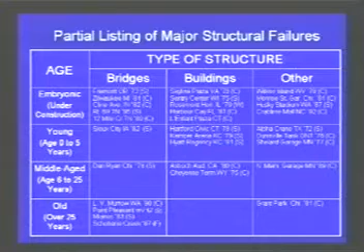The failure of the jump lift forming system of the Willow Island cooling tower in 1978 was the worst construction accident in the history of the United States, and it killed 51 people.

Failures have occurred in concrete parking garages as well in the embryonic category, including the collapse of a bay of the Crabtree Valley Mall parking garage in Raleigh in 1993, and the collapse of the Monroe Street parking garage in Chicago in 1981. Further, we've had many failures of concrete bridges during construction.

Including the collapse of the 3 spans of the post-tension Cline Avenue Bridge in Indiana in 1982, the collapse of a long span I-girder of the 12-Mile Creek Bridge in Kentucky in 1989, and the joint failure of the post-tension segmental Zilwaukee Bridge in Michigan.

Even though they all have a distinct cause, the failures were influenced by the heavy weight of fresh concrete or low early age strength, which often requires as much engineering attention during construction as is given to the final design of the structure. Simply being overly conservative in providing shoring or other support during construction does not offset the lack of critical requirements.

There have also been numerous failures during construction of steel structures, which most commonly are due to instability or insufficient bracing during erection, and we've also had brittle fractures of steel structures, but I'm not going to go into these.

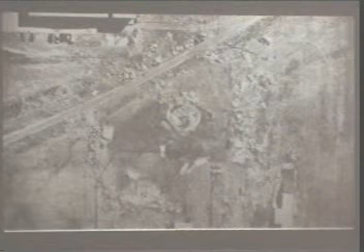This is a view of the site after the collapse of a post-tension concrete standpipe. An aerial view shows the concrete standpipe as the small circle in the center of the picture.

That was a 50-foot diameter pipe. I should note Carl Peterson is here - Carl and I were the ones out on the site very shortly after the collapse. This occurred in February 1976, and the weather was very cold. The collapse was sudden and violent, sending debris throughout a 500-foot radius from the standpipe.

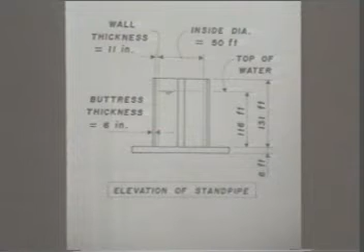Here's an elevation of that standpipe. It was constructed in 1974, so it was 2 years old at the time of the collapse, and the water depth was 116 feet.

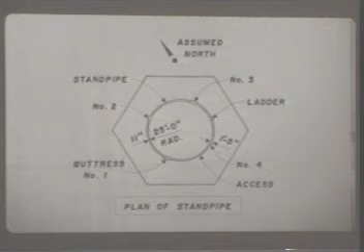Here's a plan showing the standpipe. The buttresses for the post-tensioning tendons were located at the quarter points of the standpipe, and the tendons extended 3/4 of the way around the tank so they could be overlapped 1/4 of the tank for each successive tendon as you go up the structure.

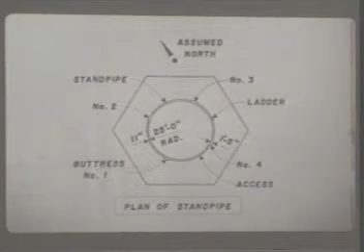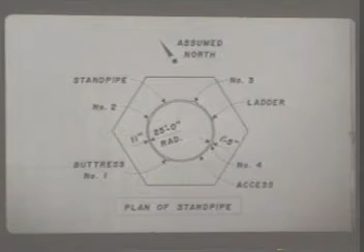The tank was slip-formed, but unfortunately the workmen walked off the job shortly after beginning the slip forming operation. To keep the job going, the contractor went into town and recruited a number of entirely inexperienced people to continue the slip forming operation.

Here's another aerial view. The closest person to this standpipe was on top of a fuel truck unloading fuel, down in front of the standpipe about 100 feet away from it. This person was standing on top of his fuel truck.

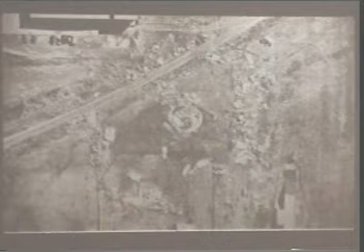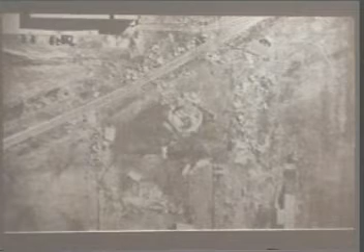This person said he heard a loud noise. He looked up and saw the tank coming apart, and as he stood on top of his truck he was dodging the post-tensioning cables as they flew out away from the tank. Then he held onto the truck as a wall of water hit it, but he walked away entirely unscathed. I suspect he probably had to go home and change clothes, but at least he wasn't hurt.

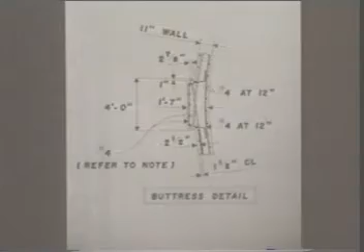Oops, did I go too far? Yep. No.

This is a detail of the buttress, and you can note the number 4 U-shaped bars intended to prevent the buttress from separating from the tank. One bar was required by each tendon anchorage near the bottom, where the tendons were closely spaced.

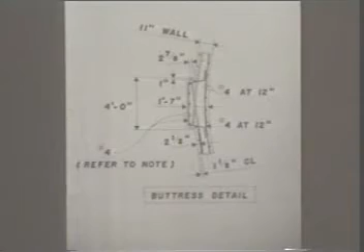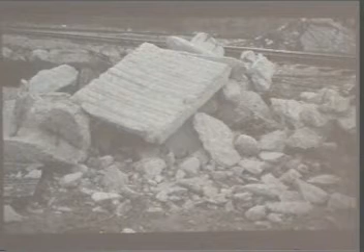This is the anchor detail, and you see there were 2 number 4 bars to be placed just ahead of the anchor. But here you see a piece of the buttress out in the field of debris. The separation occurred in the plane of the post-tensioning cables, and you can see only 1 small piece of reinforcement going through there - maybe a couple on the other side, I don't remember - but very obviously the hairpin reinforcement bars did not get put into the buttress the way they were supposed to have been done.

And as a result, there was this separation of the buttress in certain areas, at least, from the wall of the tank.

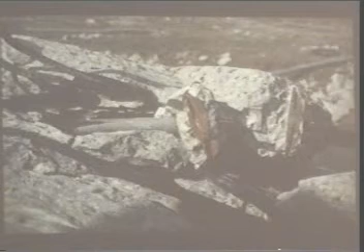Here's another view showing the anchorages and how, because of the lack of the hairpin reinforcement, they were able to simply pull in and force the separation there, at least in certain places.

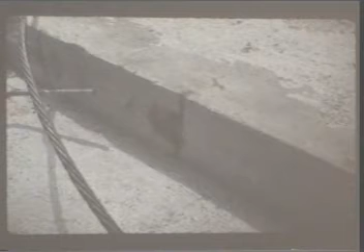Well, here's a piece of the buttress and the wall of the tank which did not separate, and it's a quite large piece. But we know that the failure occurred as a result of the lack of the hairpin reinforcement.

But I guess the question is, why did this grossly deficient construction survive for 2 years before the failure? I think that was due to the ability of tension in the concrete to sustain the stresses of the buttress. But then what was the likely trigger of the collapse?

But this is what you would have seen had you been looking at that tank just a short time before the collapse occurred.

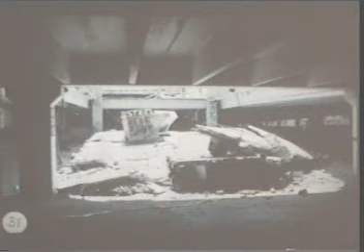In July of 1989, one section of this ramp immediately below the top level collapsed, as you see in this slide.

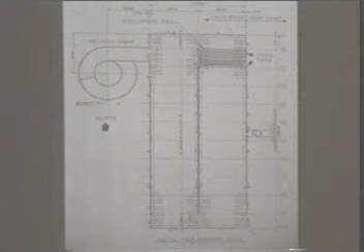Here's a plan view of the area where the collapse occurred. The collapsed bay was at a location where there was a drive-through between the old construction and the new construction. The double T beams in this area had a length of 57 feet.

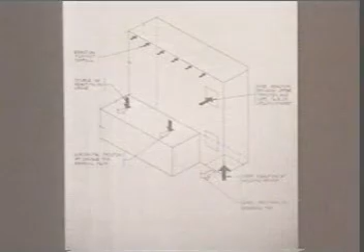Here's a drawing of the spandrel. It was supported by a bearing pad at the reaction and also 2 pads against the column. Here's another view indicating where those reaction points were located. The pads taking the primary loads were shown in the preceding slide, but we should be well aware that volume changes may impose additional forces at these reaction points, which can be quite large.

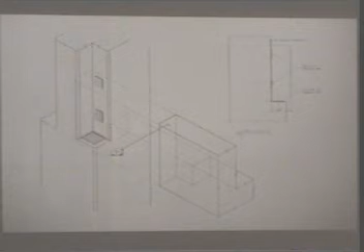Here's a view of the end of the spandrel, where it fell on the lower deck. Here's the end of the spandrel right here. This is concrete that was the curb on top of the double T beams. This is the end of the double T beams at this location.

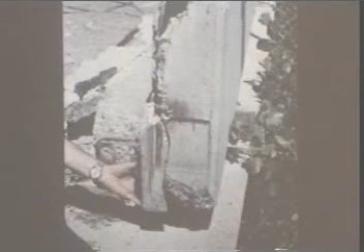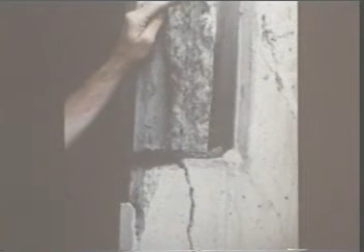The spandrel beam was taken to a storage yard where it could be examined much more closely. A piece of concrete was found at the site, which perfectly fit into the end region of that spandrel beam. This is that same piece of fractured concrete taken back to the structure and set in place on top of the column.

It is very evident here that there has been both rotation and movement of the spandrel away from the column, and also that the bearing pad was badly disintegrated due to volume change forces and to repeated loading from the crossover traffic. Many early precast decks were built which relied on shear transfer through pads for stability and to accommodate volume change movements.

And it is now recognized this was not good practice. While many of these decks have been retrofitted or repaired, there are many others where I think this condition is still of concern. In guarding against failures, I think engineers need to be aware of this condition.

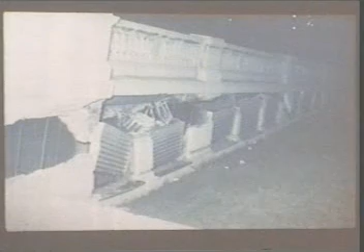I see I'm kind of in an in-between place here, so I think I'll try to quickly show this case history in abbreviated form. This is a parking garage in Chicago, Grant Park Garage, and the failure began along this ventilation opening on a Saturday evening when part of the top of this underground garage dropped down, as you see here.

A few hours later, it fell to the ground, as you see here. Here's a view of the debris on the lower floor, and another view. Here's a plan of the area that collapsed, the area in yellow.

You can see that in that region, the framing is different than in the other regions of the parking garage, where it was either beam and slab construction or flat plate, flat slab construction. This is a section through the area where the collapse occurred.

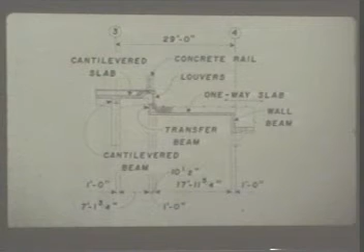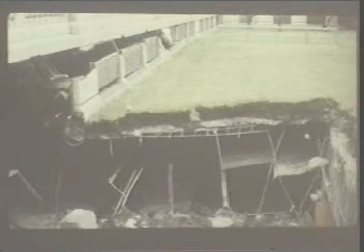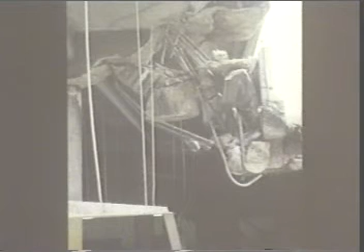Here's the section through the area that collapsed, and you can see the picture. The failure is believed to have initiated in the cantilever beam on the left-hand side here. Here's a close-up view of that cantilevered beam. It shows why it partially collapsed.

You can see the negative moment reinforcement in the beam that extended out to the end of the beam and then down to pick up the end of the one-way slab. When the failure suddenly occurred, that reinforcement served as a tension tie and held the end of that one-way slab for several hours before the steel pulled out and allowed the entire bay to collapse.

Here's a view of the drawings that were available on that structure, hard to see, but this is the cantilever beam, and this is the beam behind it, the anchor main span, labeled B256. You can see that the designer or whoever was doing the detailing didn't quite know what to do in this region, so he put B256, but he put it in parentheses.

Then when it came to the table - is that B256? Yes. You can see that they called out the reinforcement in the manner that you would expect and typical for that time, where they detailed the location of every single stirrup reinforcement in number of inches from the center line of the column.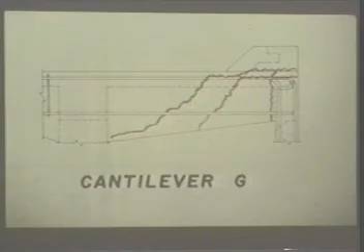You see the absence of the shear reinforcement here. Now, if that cantilever, after the debris is cleared away, you can look at that picture and decide this is probably what the crack pattern was that precipitated or caused the failure.

And when that debris is stripped away, you see the dark colors there, which is seepage of concrete, water and debris down below. But then you can also see how over time corrosion of this main reinforcement occurred in this region here. These bars now were very closely spaced - they're number 11 bars. They did not have any confining reinforcement, so I think that once corrosion started in that region and you started to drive a splitting crack, it was just a question of time until failure. In fact, it took 30 years for the failure to occur.

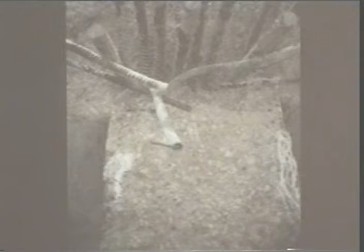A closer view of that, you can see the rust and the imprints of the bars. And the collapse did not extend further because of the stairwell to the right, which served as a supplemental support and kept it confined.

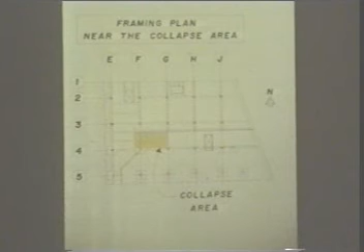Now let's go back to this one. The next cantilever over from G is H - I'll show that in the next slide. And the next cantilever over from that is the one at J. So here's the one at H. It partially failed, but did not totally collapse because of the stairwell.

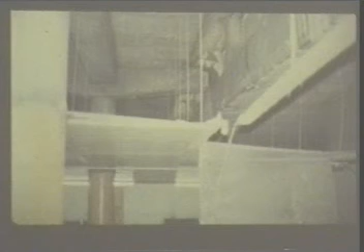And the next one over, you see in the background there, has a little bit of damage to it. The white region there - I'm having trouble getting the picture from this angle - the white region on the bottom there was where some concrete flaked off, but you can see that the main crack is there but did not even open in the cantilever beam.

And imagine this picture without that white region there, and probably without some of that other incline cracking. That is all that you would have seen had you made an inspection of this structure in advance of this collapse.

Well, why did that last for 30-some years? It was because the concrete strength was about 6,000 or 7,000 psi, and consequently the concrete contribution to the shear itself was sufficient to hold or provide for the strength of the beam.

Okay, next go back to the view for my concluding remarks. Let's then now try to draw some observations from these failures and also from the table. Failures and collapses of middle-aged structures have occurred due to volume changes, shrinkage, creep, and temperature, and this phenomena did not receive sufficient attention in design for a long period of time.

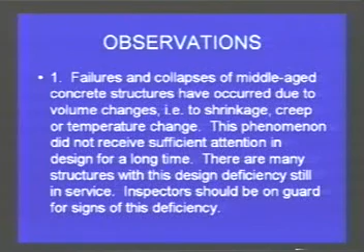All failures in the old category were in structures exposed to the environment and were due entirely or in part to the effects of corrosion. Corrosion of embedded steel has been the trigger for collapses also in young and middle-aged structures. The corollary, I believe, to this is that if a structure survives to an old age and is not exposed to the environment, it is going to have a very, very long life.

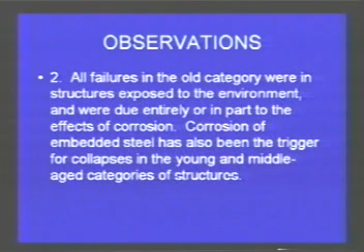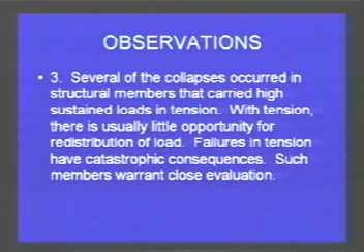Several of the failures occurred in structures that carried high sustained loads in tension. There's little opportunity for redistribution, and these kinds of failures have catastrophic consequences. We need to give these conditions very close attention.

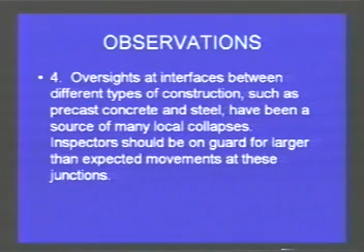Oversights at interfaces between different types of construction, such as precast concrete and steel, have also been a source of many local collapses. You should be on guard for larger than expected movements at these locations, at these junctions.

And finally, most of the failures can be attributed to large errors in design or construction. Or to be blunt, when you get down to the root cause of the failure, they're really blunders. Evaluators should recognize in making a condition assessment or the like that errors of the order of magnitude of 20% rarely have a significant influence on the safety or serviceability of a structure. You have to be on guard for large errors of the order of magnitude of the safety factor.